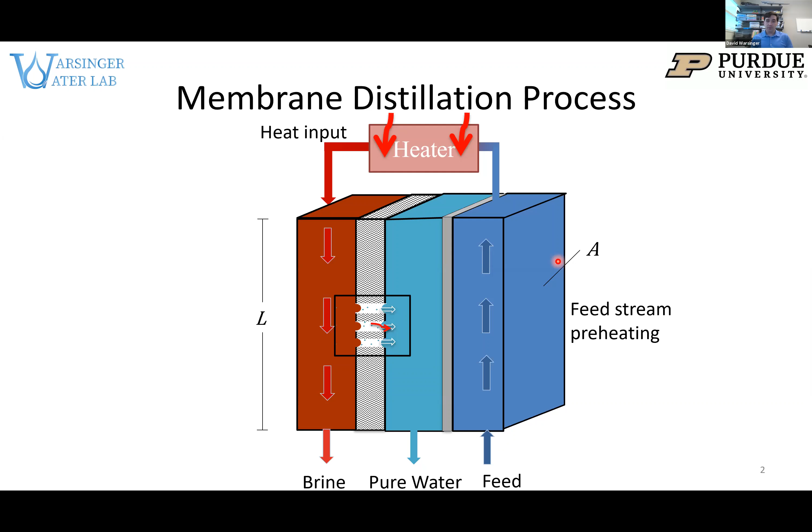There are a few different configurations used for membrane distillation. Perhaps the most common is air gap membrane distillation, and these configurations are often defined by what is occurring in the gap between the membrane, shown in gray, and the condensing surface, shown here in an orange copperish color. Air gap membrane distillation is particularly good for higher salinities.

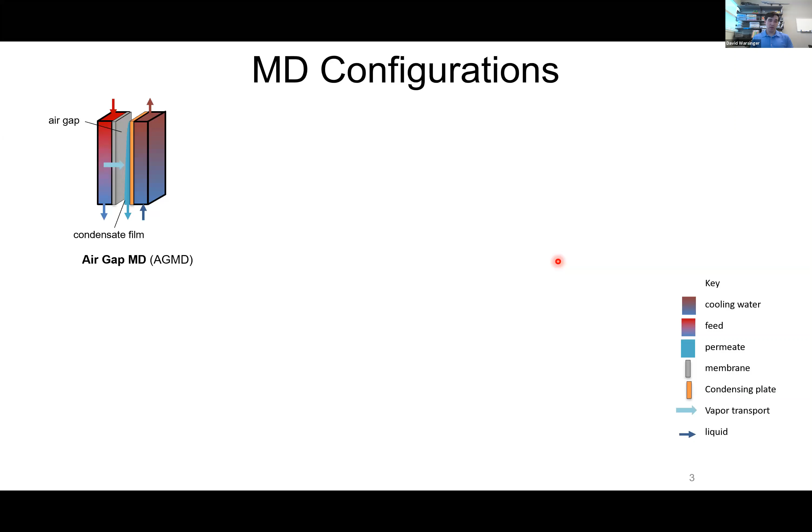There's also permeate gap, or PGMD, which is the acronym used in papers in the field. This is where the entire gap is flooded with pure permeate water. We can improve upon the permeate gap configuration by having conductive materials in the gap to minimize the temperature gradients everywhere besides the membrane itself, where we want our high temperature gradients.

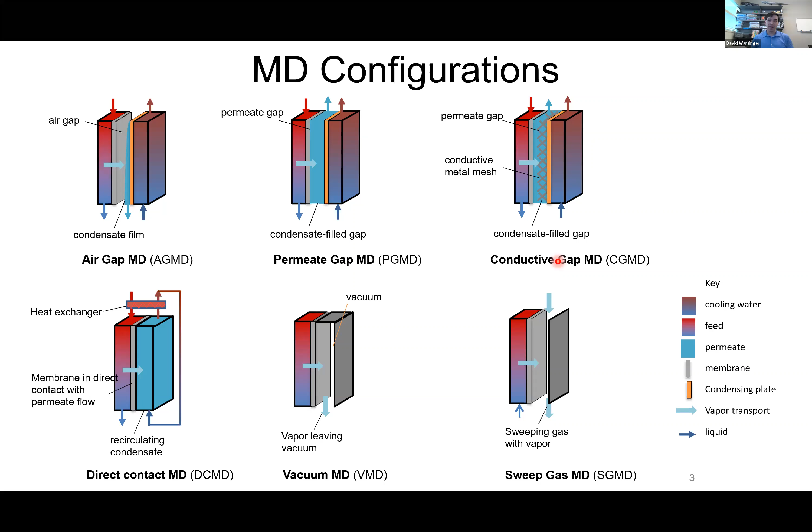There are also a few different process modifications. In direct contact membrane distillation, instead of preheating the feed water, we actually recirculate the pure water in the heat exchanger approach with an external heat exchanger. In vacuum gap membrane distillation, we have a vacuum pump that pulls water vapor out with external condensation. Similarly, sweeping gas membrane distillation has a flowing gas that passes by the cold side of the channel and also has external condensation. So what do the flows in a membrane distillation system look like?

Well, it's a lot like a heat exchanger.

We have a temperature gradient going from the hot side to the cold side, with energy flowing from hot to cool. There are two main components of this energy: the conductive heat losses, which are essentially a loss and inefficiency of the process, and the water vapor evaporating and condensing, which is our desirable desalination effect that we want to maximize in this process.

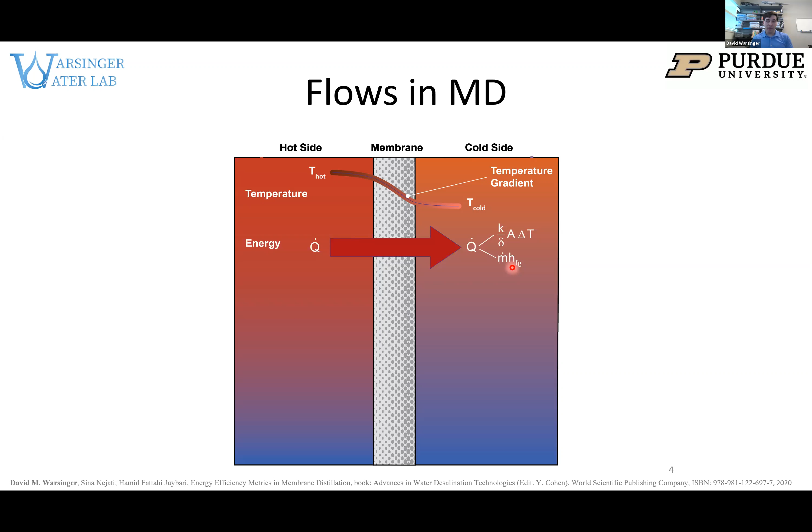Whenever you have heat transfer across a temperature gradient, you're going to have the generation of entropy, and we see that in these systems as well. Likewise, our exergy, or available work, is going to decrease as we have heat transfer across a temperature gradient.

There are a few different key parameters for generally defining membrane distillation systems. First is the permeate flux, simply a normalized water flux per unit area that goes to the membrane. This parameter is important because it essentially allows us to conceptualize the capital costs in these systems. These systems are typically in the range of 2 to 10 kilograms per meter squared per hour, although some systems can reach much higher water fluxes.

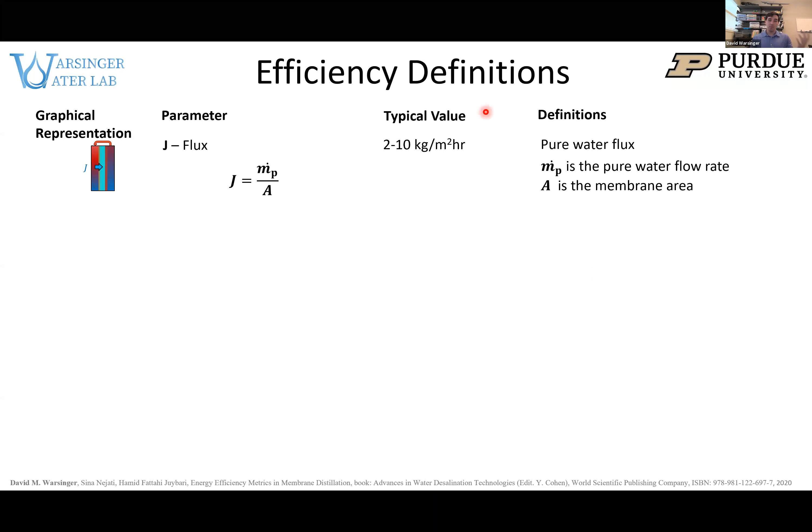Our key efficiency parameter for thermal desalination is GOR, the gained output ratio. We can think of this as an energy reuse multiplier comparing us to evaporation and condensation without any heat recovery. The GOR is defined as our pure water flow rate times our latent heat, divided by our total heat input. At a baseline, boiling water and condensing without any heat recovery, but without losses, would simply have a GOR of 1. Now we're ready for our first audience poll.

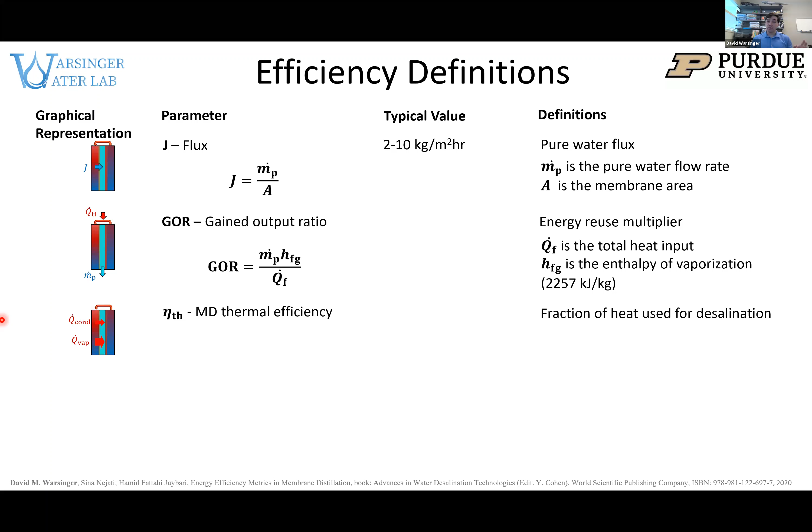Our next key parameter is the thermal efficiency. This is something we can test not on a system level, but on a small coupon scale level. It's basically describing the fraction of our heat that is actually used for desalination—essentially the evaporation heat transfer, QVAP, divided by the total heat transfer. It's capped at 1 because we can't have more than 100% of the heat going towards desalination. Typical values range between 0.5 to 0.93. This is a great parameter to analyze experimentally in the lab, to understand how new materials and innovations can improve the performance of membrane distillation.

Finally, our very key parameter is the second law efficiency. This is our most fundamental universal thermodynamic efficiency, which we can use to compare membrane distillation to a wide variety of other technologies, including those not powered by waste heat or low temperature heat. It is defined by the minimum work of separation, given a particular water recovery, divided by how much work you actually used. For most thermal desalination systems, these values are typically between 0.1 and 10%. Thermal desalination today is not extremely efficient, and we see this a lot in issues in systems that use low temperatures and have large amounts of heat transfer.

Let's graphically compare the gained output ratio efficiency versus our second law efficiency, which actually includes exergy destruction. We see that second law efficiency is a strong function of temperature. Membrane distillation systems demonstrated so far vary across a wide range, usually kept below 100 degrees Celsius. When hybridized with other systems that can use higher temperatures, they can be more efficient. There's enormous potential for solar membrane distillation systems, but we're still early in understanding and modeling and designing them.

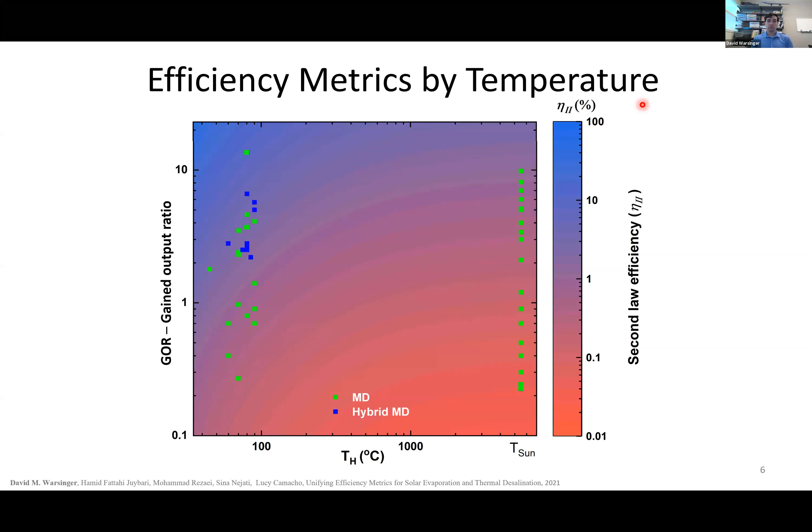We also have a mass transport challenge: we want to maximize mass transport from the evaporation surface to the condensing surface, but minimize heat transfer through conduction in that same area. That makes membrane distillation a really interesting heat transfer problem for optimization. We can also have a few different condensation regimes in air gap membrane distillation, which I'll talk about shortly.

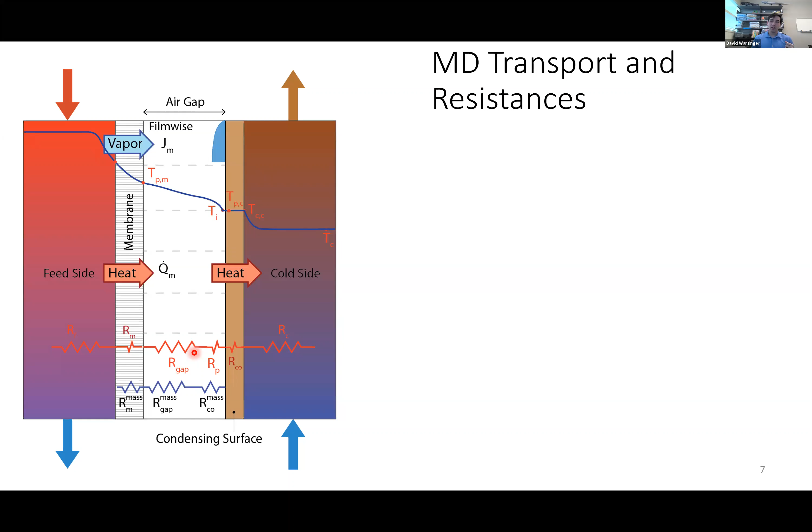So how do we model these systems? There are heat exchanger approaches we can use. There's also 1D discretized or computational modeling, where we do a resistor analysis but break it up into many subsections over a long heat exchanger. We can also use CFD analysis, which is especially important for designing better spacers to reduce temperature polarization.

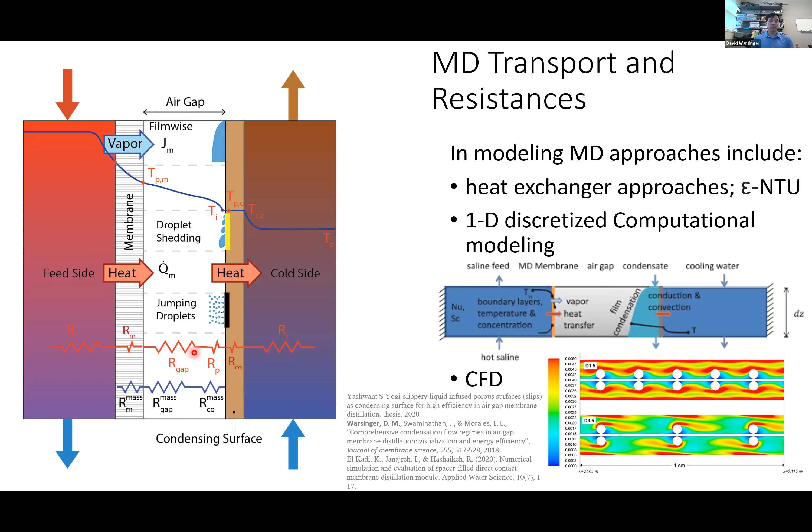What kind of condensation regimes do we encounter in membrane distillation? Typical classical film-wise condensation has been the oldest studied and longest modeled, but it's fairly simplistic, especially given that real systems can be more complex with very narrow geometries. We can have drop-wise condensation using a hydrophobic condensing surface, allowing for enhanced mass transport and draining. Using super hydrophobic surfaces can even cause jumping droplet condensation, which gives excellent heat and mass transport performance.

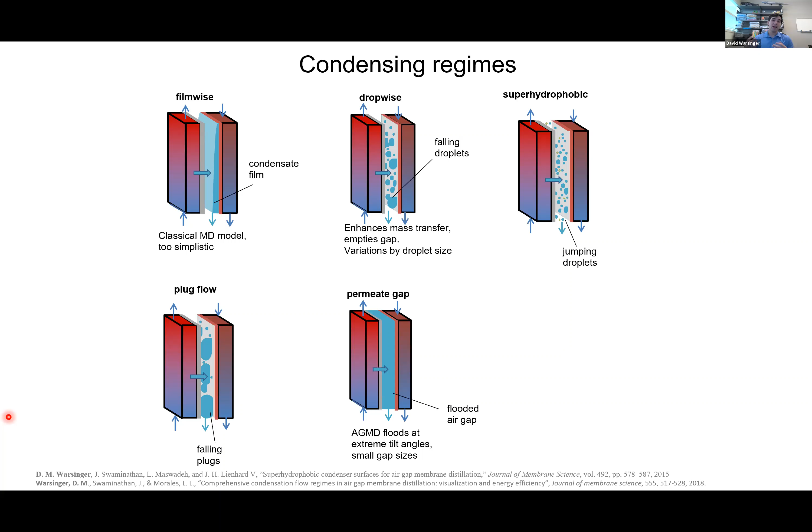We can also start having plug flow as the system begins to flood. If water accumulates faster than we want, we may go into permeate gap mode. In some cases we want a permeate gap, but often at higher salinities, we want a larger thermal conduction resistance in this gap, so permeate gap is undesirable. Notably, to hold up the membrane we often have spacers, which can cause wicking or blocking effects that either help or hinder draining of water droplets.

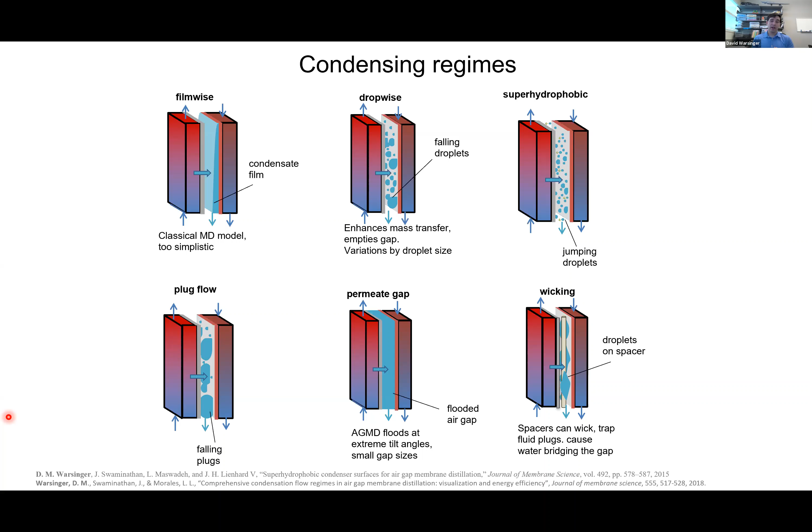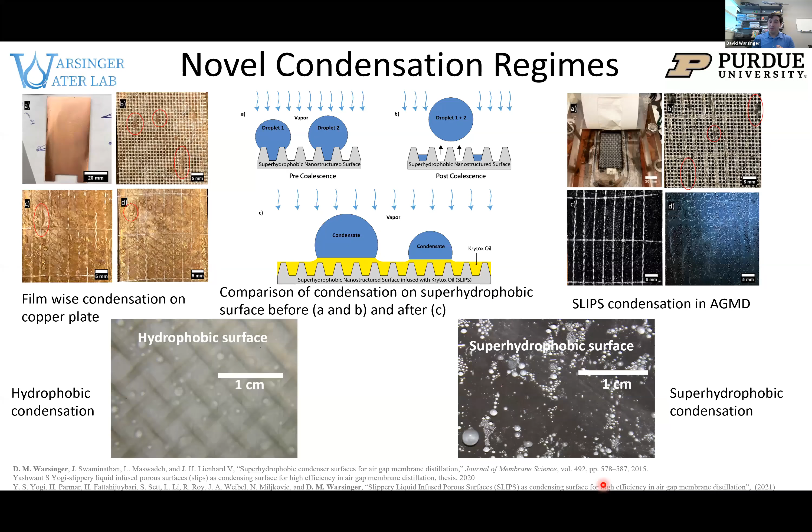So what do these condensation regimes look like? We can use structured nanomaterial surfaces to cause dropwise or jumping droplet condensation. We can use SLIPS surfaces, which we've done in past research. Looking at a condensing surface, we can compare a classical film-wise copper surface versus a super hydrophobic coated surface, visualized through condensing on a sapphire plate so we can see through the entire system. Here we've removed the membrane module, and you can see the variation in droplet sizes and the impacts a spacer can have.

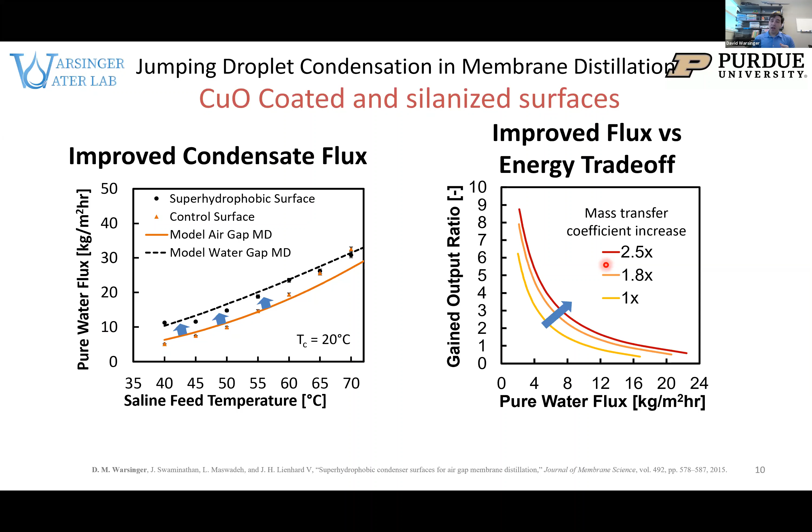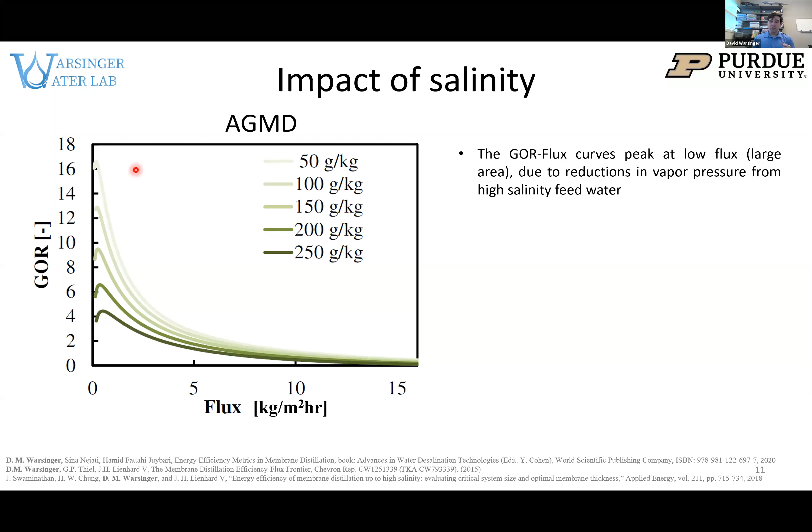Notably, salinity has a major impact on the performance of membrane distillation. This occurs because the presence of salt in the feed water reduces water vapor pressure, leading to lower efficiency. Our maximum possibly achievable GOR, modeled here, will reduce. There's actually a peak maximum GOR achievable under varied salinity conditions, at pretty low flux, because as we get to even lower fluxes we have reduced evaporation from the high salinity, making conduction losses more important. These types of optimizations are key for membrane distillation design.

David talked about conventional membrane distillation technology, and this process has gained interest in research as well as practical application. You've seen many pilot systems being tested, and Guillermo will talk about these pilot studies later. But this technology still has several limitations, and I'll go over some of these with you in my talk. First, in this process, the thermal energy is provided by the hot feed water.

So your total energy input into the system is coupled with the feed flow rate, and the clean water we are recovering is therefore limited by how much feed flow rate you're providing. And so that limits our single pass water recovery to a maximum of about

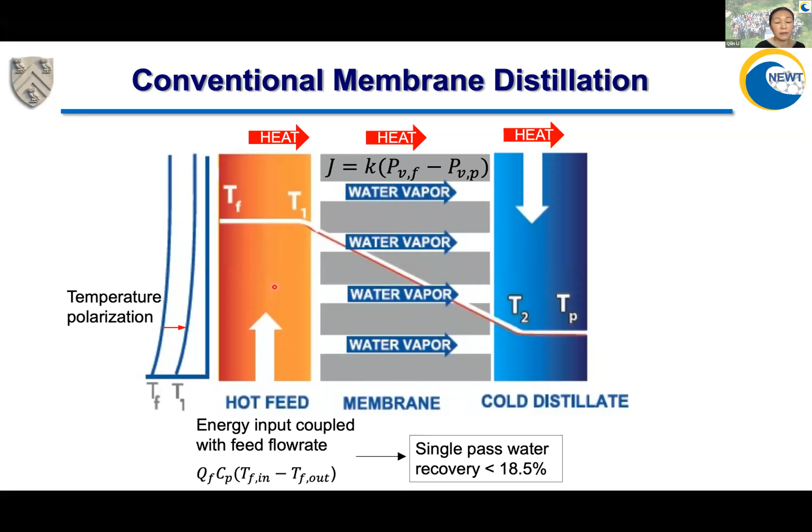18.5%. Secondly, when David talked about temperature polarization, right? The heat transfer nature of this process dictates that the temperature on the membrane surface on the feed side is going to be lower than the bulk feed temperature. And similarly, on the permeate side, the temperature on the membrane surface is going to be higher than your bulk permeate or coolant temperature. And so that reduces your effective temperature difference across the membrane, meaning here T1 minus T2 can be significantly lower than TF minus TP, depending on the hydraulic condition in the feed channel, and that reduces your flux of the membrane.

And thirdly, this process, like a heat exchanger, the average thermal driving force is going to decrease with increasing membrane module length. And so it has been difficult to scale up this technology.

And finally, because our heat is provided by the feed stream, when the brine exits the membrane module, there's still significant amount of thermal energy in the brine. So recovering that thermal energy from the brine is very important in improving the overall thermal efficiency of the process.

Now, if we change this heating strategy instead, if we can put a coating on the membrane surface that can generate heat, either by photothermal conversion or by Joule heating process, then we can decouple our heating supply from our feed water's flow rate. Here we can independently vary our energy input, and as such, this would allow us to gain a much higher water recovery in the process.

And because the surface of the membrane is hottest in the system, we're actually reversing the temperature polarization. And because the water is being heated while it's moving along the membrane surface, we will be able to maintain the thermal driving force better than the conventional membrane distillation process.

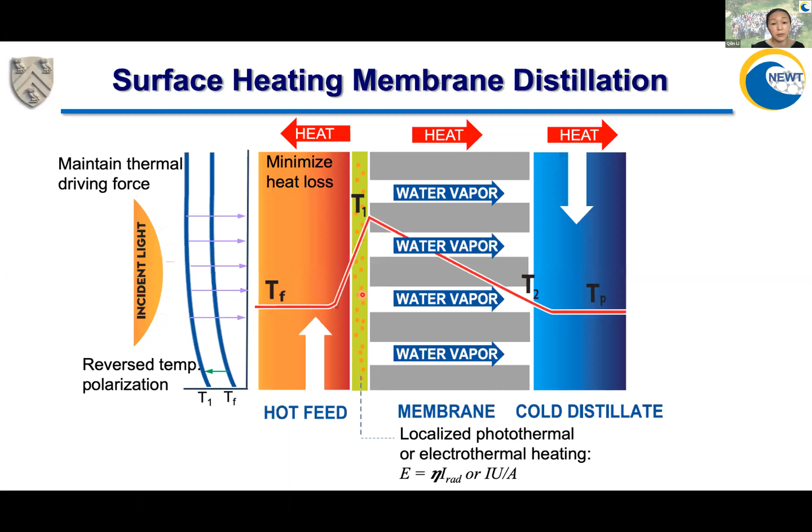So I'll briefly talk about each next. A lot of photothermal nanomaterials have been used for photothermal evaporation or photothermal distillation. Some of these have also been used for photothermal membrane distillation, and they include plasmonic metal nanoparticles, semiconductor materials, and most widely used are carbon nanomaterials because of their low cost and broad spectrum absorption from sunlight.

And some polymers and hybrid materials have also been used. There's a lot of research that has carefully designed the structure of the coating for enhancing evaporation efficiency, and those are mostly designed for solar evaporation, where you would try to draw liquid water to the surface exposed to sunlight and maximize evaporation efficiency. If you're trying to use the same material for membrane distillation, there are additional considerations because we're now using it in a continuous flow system where there is significant hydraulic shearing and potentially pressure as well in the system.

So in the design of the coating, we need to consider very carefully the material used, the binders that are used, and the structure of the material applied to maximize light absorption and minimize reflection of sunlight. We also consider thermal conductivity, as David mentioned, since one loss of energy is conductive heat transfer through the membrane.

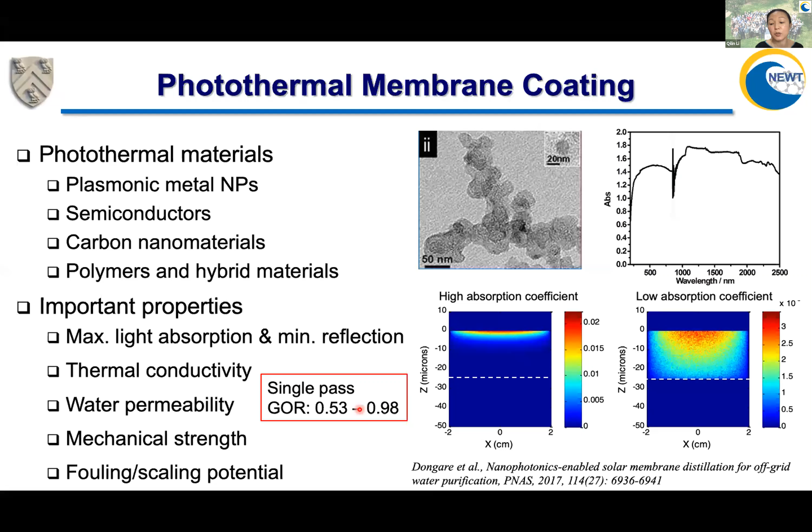So far, among the various photothermal coatings that have been tested, the single pass GOR - this is the energy utilization for evaporation when you have water passing through the membrane module one time without any heat recovery measures - ranges from 53 to 98%. 98% is really, really good energy efficiency. So we are there in terms of photothermal materials.

Now, one of the most commonly used approaches to apply these photothermal materials onto a prefabricated hydrophobic MD membrane is electrospinning, and it has a lot of flexibility in terms of incorporating different types of photothermal nanomaterials into the coating structure, and naturally forms a very porous coating layer on the base membrane surface.

Now, if you have a hydrophobic nanofiber coating, the air-water interface is going to form on top of the photothermal coating. That actually reduces the amount of heat exchange between the coating material and the feed water, as well as increasing the vapor transport resistance across the membrane. So now the vapor has to transport not only through the base membrane, but also through the coating.

But if you make the coating hydrophilic, then the liquid water will be able to penetrate through the hydrophilic coating completely. So you still have your air-water interface formed on the base membrane surface without adding any vapor transport resistance. At the same time, we maximize the contact between the liquid water and your photothermal coating, maximizing heat transfer from the coating to the feed water.

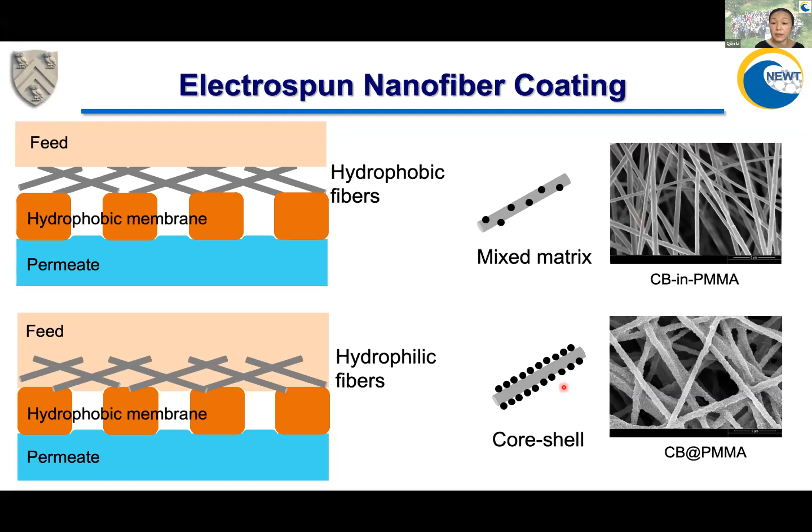And here are some of these results to show the difference between these two different approaches. As you can see in this first case, we have carbon black photothermal nanoparticles in a mixed matrix nanofiber that's embedded in PMMA substrate. Because PMMA is hydrophobic, you form a very hydrophobic surface coating. And in the second case, we have the carbon black nanoparticle coated on the PMMA nanofiber surface.

Let me see if I can play the video here. Oh.

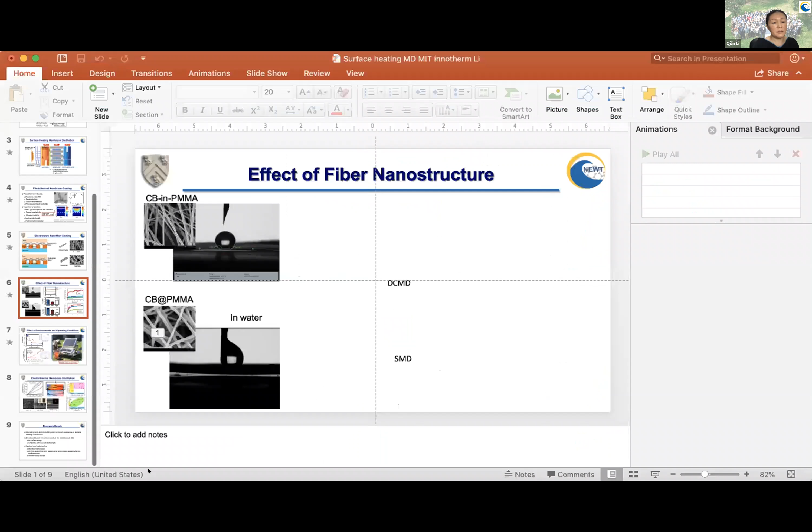I was having some issue.

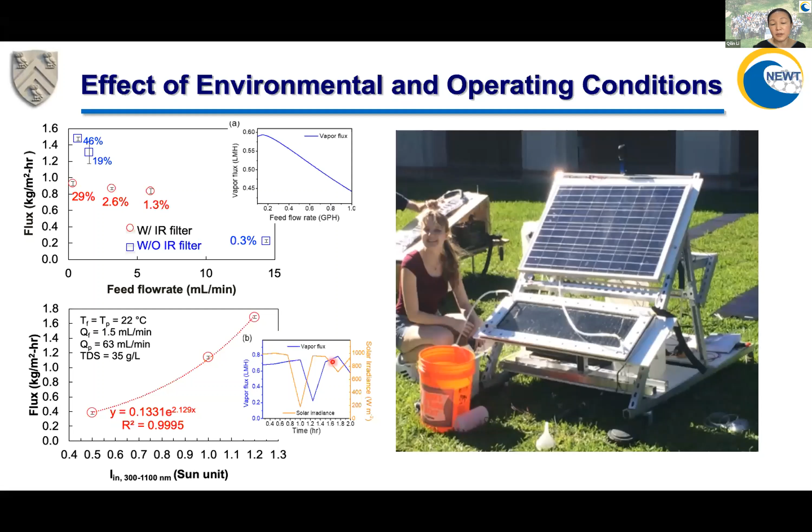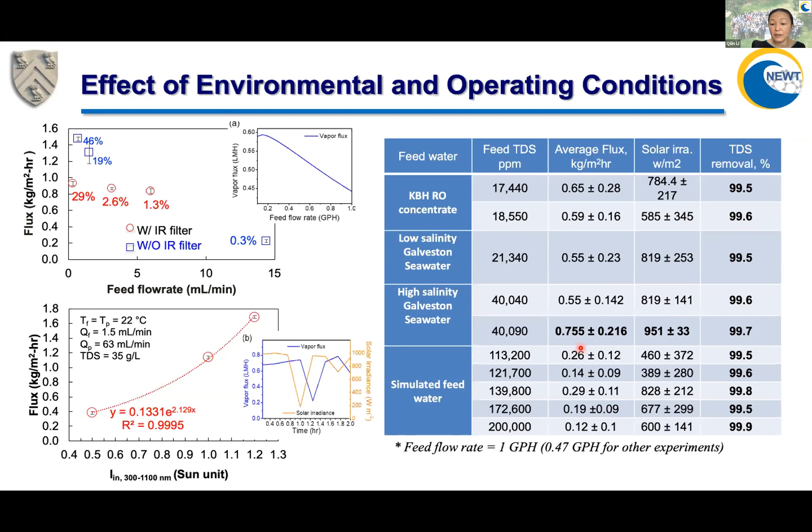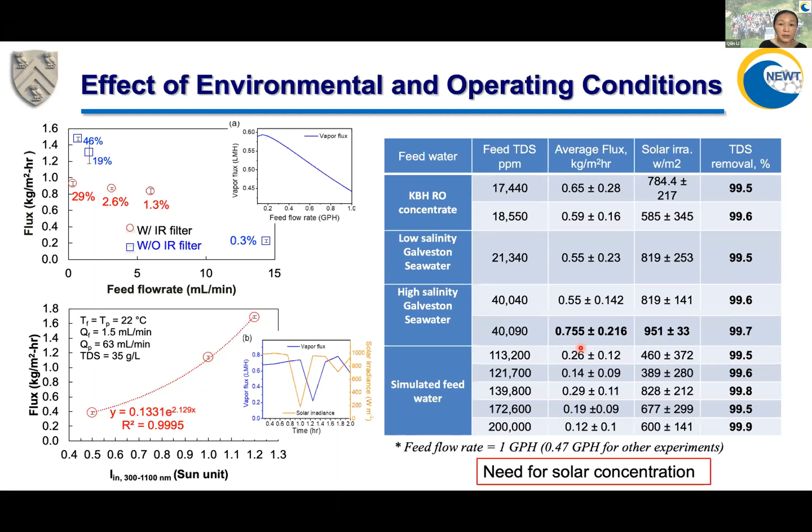This tells us that if this process is to succeed for practical industrial applications requiring much higher production rates, we need to increase the energy input intensity, meaning we need solar concentration. A different approach, distinct from solar, is to use electricity to provide surface heating and the high energy intensity needed for high water recovery and high water production rate.

So the technique we developed applies an electrically conducting coating on the membrane surface. This work, the first electrothermal MD work, was published by Professor David Jassby's lab in 2017, where they used a carbon nanotube coating bound by PVA and demonstrated clean water production by putting an electric current through the coating. This was the first demonstration that you can use a Joule heating material to achieve membrane distillation.

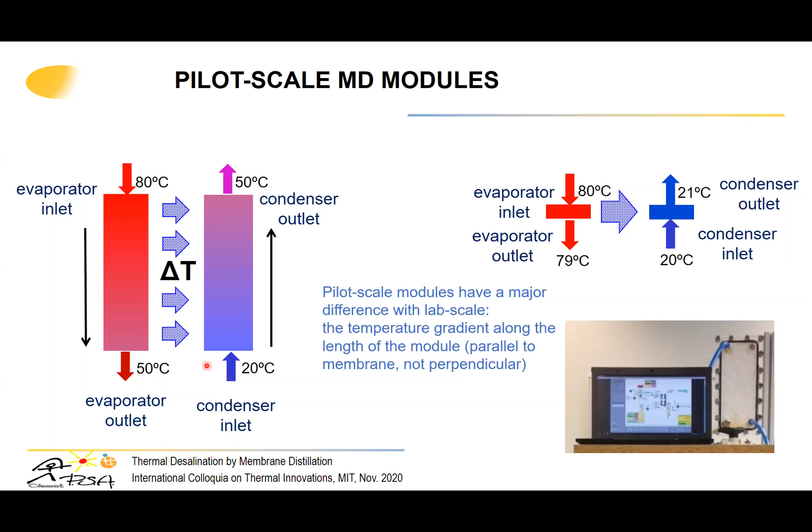Membrane distillation requires heat, and heat is never for free. From the very early stages of membrane distillation, there's an article from 1987 by Tony Fane, noting that recovery of the latent heat of condensation is desirable. But as it happens, heat exchangers are typically more expensive than membranes. So the goal of commercial module developers is to maximize energy efficiency by recovering the latent heat of condensation internally.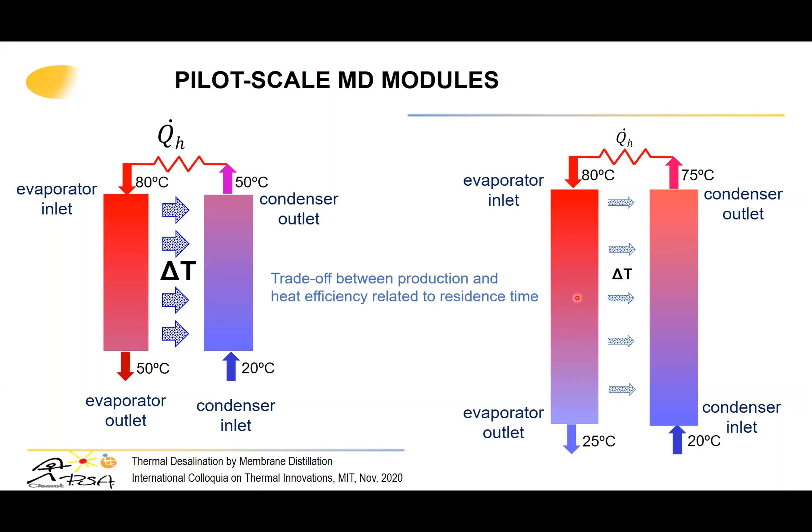This is where the length of the channels plays an interesting role. If we extend the channels, we enlarge the residence time, and by using the feed as coolant, we can preheat the feed quite significantly and reduce the need for external heat. Unfortunately, this will also reduce the transmembrane temperature difference and the driving force, so there is a trade-off between production and heat efficiency related to the residence time and ultimately the length of the channels.

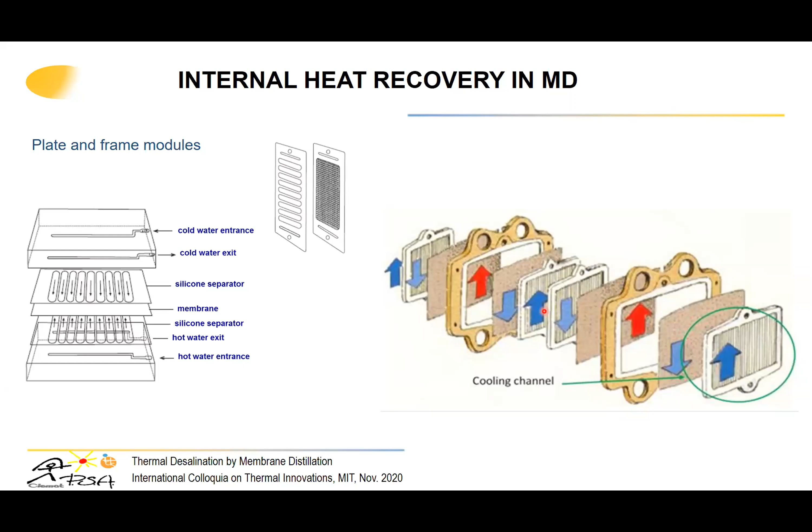How to achieve this internal heat recovery in membrane distillation modules? With plate and frame modules, it's really complicated to get long channels combining these membranes and condensate channels, and it's demonstrated by the performance results of plate and frame commercial modules, Scarab and Keppel-Seghers modules: the GOR rarely exceeds 1. Only in this case, where 3 modules are coupled in series for enhanced heat recovery, does the GOR exceed 1.

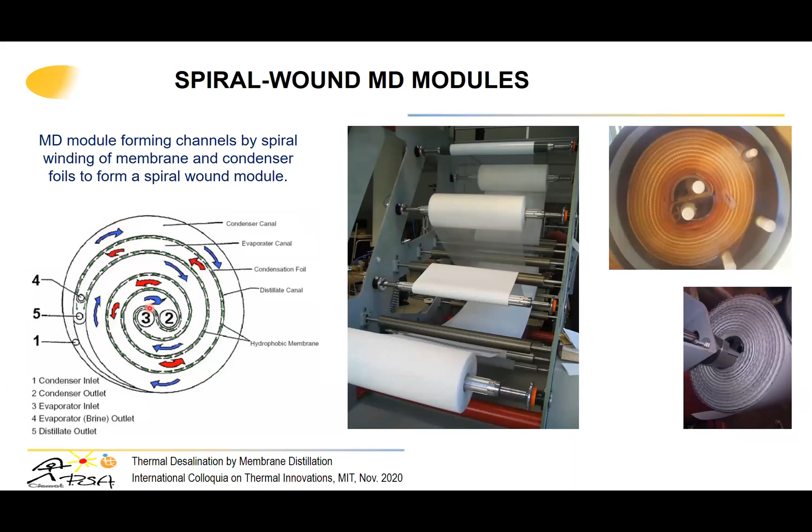Spiral wound modules have it easier for internal heat recovery by guaranteeing full countercurrent circulation, and also the hot input is in the center of the module and the coolant on the outside of the module. So there is a natural temperature gradient and natural insulation by keeping the heat inside the module.

There are several developers of membrane distillation modules, Solar Spring or Memqua, but the Dutch company Aquastill made a significant improvement by combining several envelopes in a single module. This way, there can be more channels in the module, and then the residence time can be extended for the same membrane area and feed flow rate. So that gives rise to more energy efficient modules.

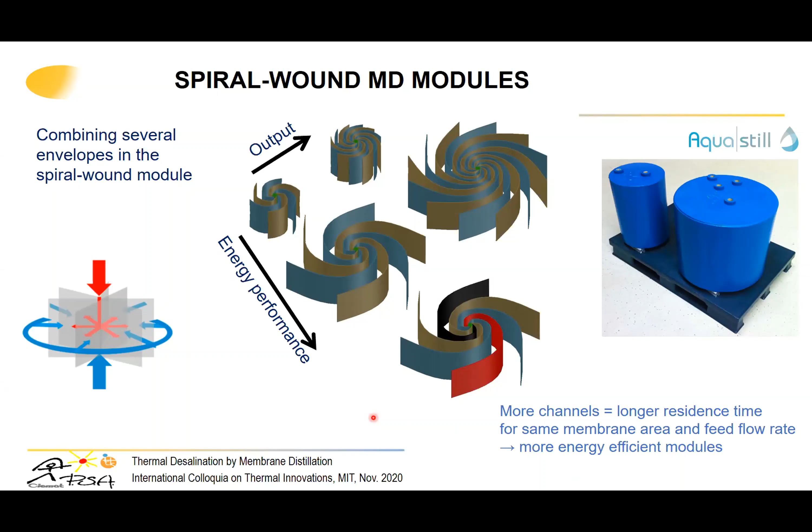Now I will present a summary of the performance analysis of spiral wound pilot scale modules along this graph that shows the flux versus GOR. For Solar Spring modules operating in permeate gap configuration, the results are along this line. An improvement can be achieved by deaerating the feed.

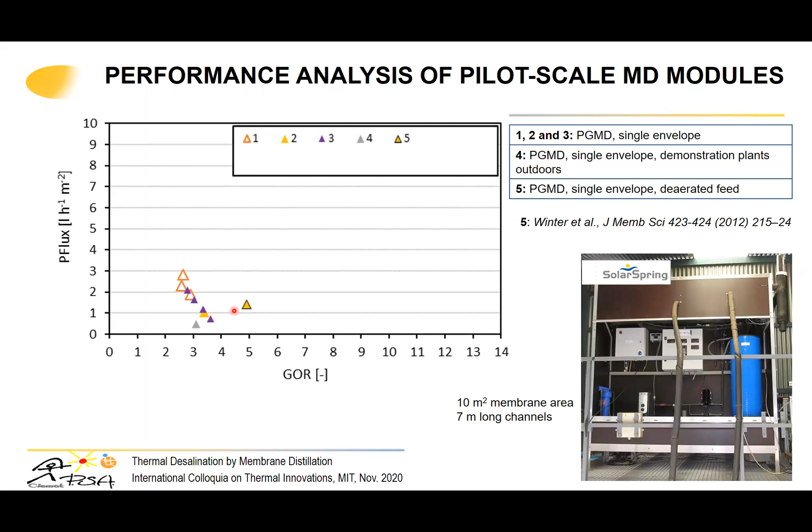Air gap membrane distillation has slightly less performance, but it can be significantly improved by extracting the air from the gap. This is the so-called vacuum-enhanced air gap membrane distillation configuration. This reduces the mass transfer resistance of the gap and therefore improves the flux with the same energy input.

So it also improves the GOR. The multi-envelope modules of Aquastill have larger flux and GOR: the shorter module has a larger flux and the long module a larger GOR than the rest. But the main disruptive improvement is operating these modules in the vacuum-enhanced air gap configuration, where we can see that the short module can reach a flux of almost 9, and the long module a GOR of 13.5.

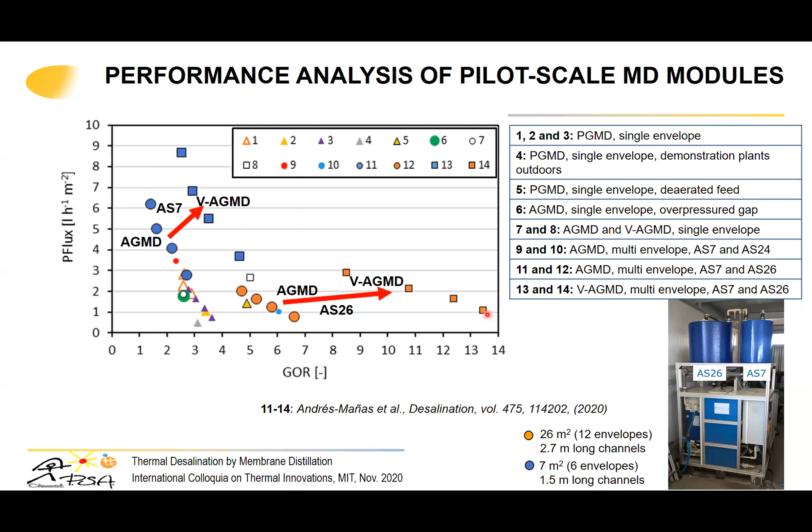This is actually the best commercial performance recorded for pilot scale modules, with a specific thermal energy consumption lower than 50 kilowatt-hours per cubic meter, and this is better than all other thermal desalination technologies. I didn't mention before that all this comparison has been done for seawater desalination. And this module has 12 envelopes and channels 2.7 meters long.

And in this case, the vacuum, extracting the air from the gap, is done with a Venturi effect suction, so therefore with a low electricity cost penalty.

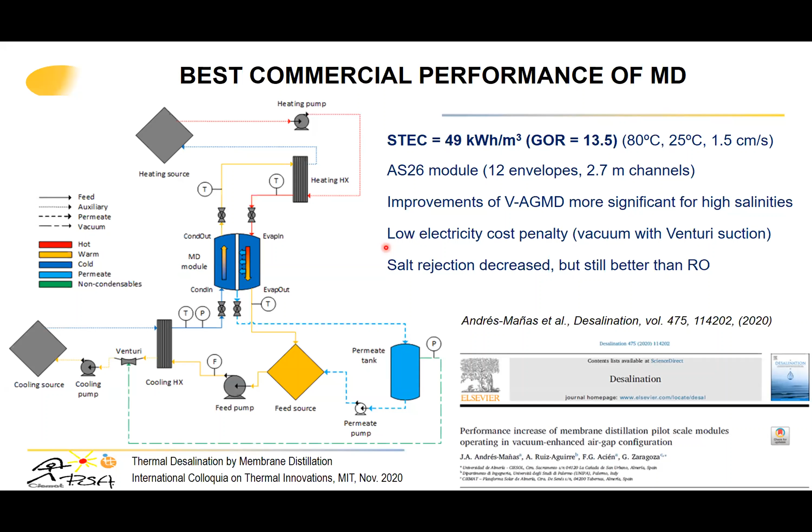Hollow fiber modules can also have internal heat recovery. As a matter of fact, this concept of internal heat recovery was first implemented in hollow fiber modules by the University of Twente in the Netherlands last century. And it has been retaken and exploited by Tianjin University, who have developed hollow fiber modules with internal heat recovery, combining hollow fiber membranes with hollow fibers acting as heat exchangers.

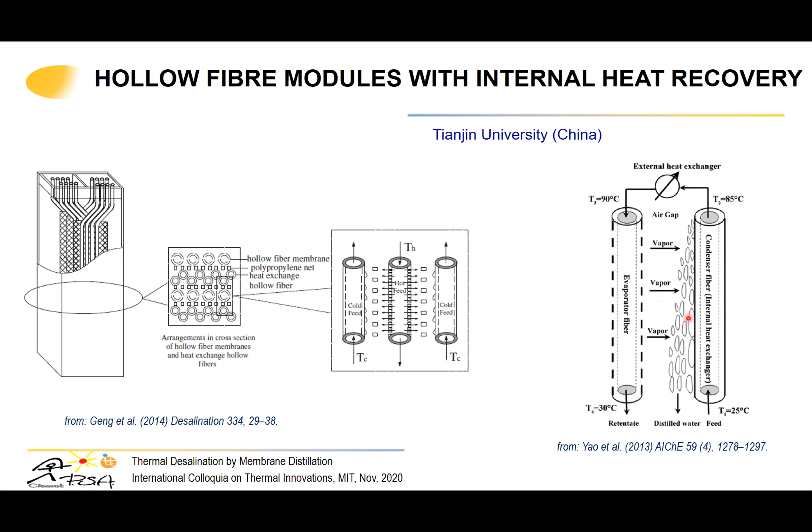So we have the feed entering this condenser fiber and heating with the latent heat of condensation, and then the hot feed enters the hollow fiber membrane. So a similar scheme as we saw before, and the results are quite promising. With modules 1.2 meters long, the GOR can be 13.8, and with modules a bit shorter, very large fluxes.

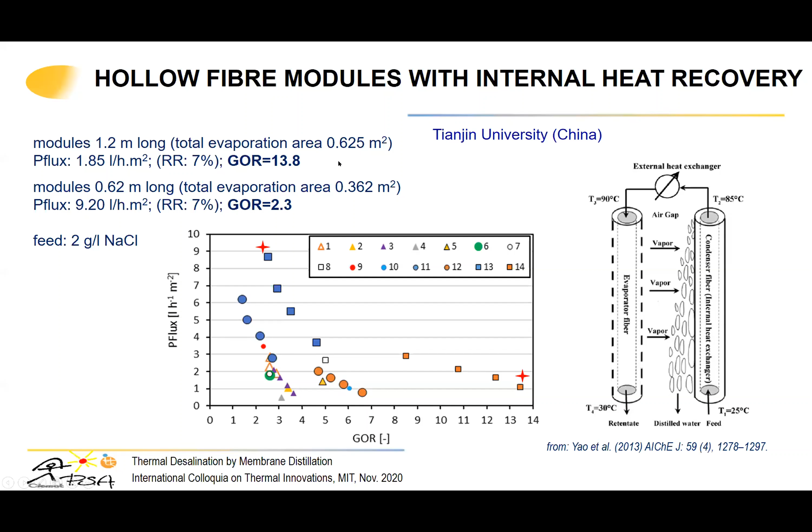So the challenge is to upscale these modules to larger membrane surface area, and also address the electrical consumption, because the hollow fibers have larger pressure resistance, and therefore we can expect larger pumping needs and more electrical consumption with these hollow fiber modules. Heat recovery can also take place: instead of heating the feed with the latent heat of condensation, we can evaporate more, recovering the heat as latent heat.

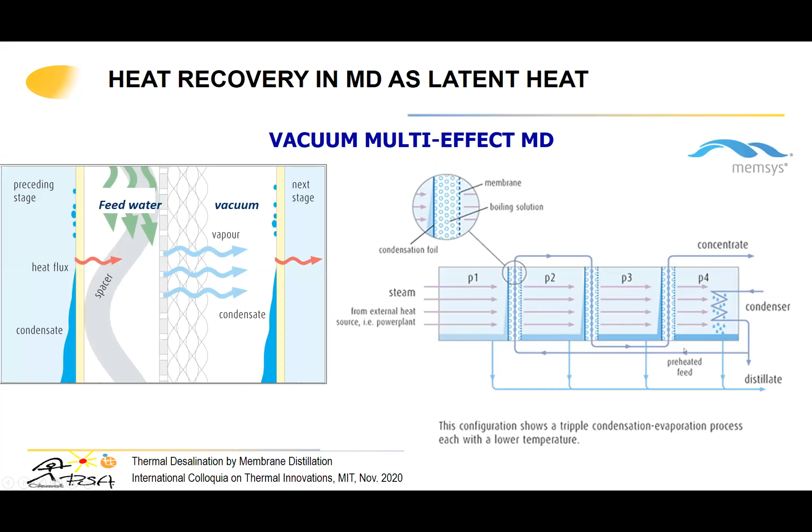This is what memsys proposed: to use the latent heat of condensation of one stage of one membrane to preheat the feed, to evaporate the feed in a consecutive effect. So they have modules with several effects reusing the latent heat of condensation for further evaporation. So it's a multi-effect configuration, and this is in vacuum membrane distillation.

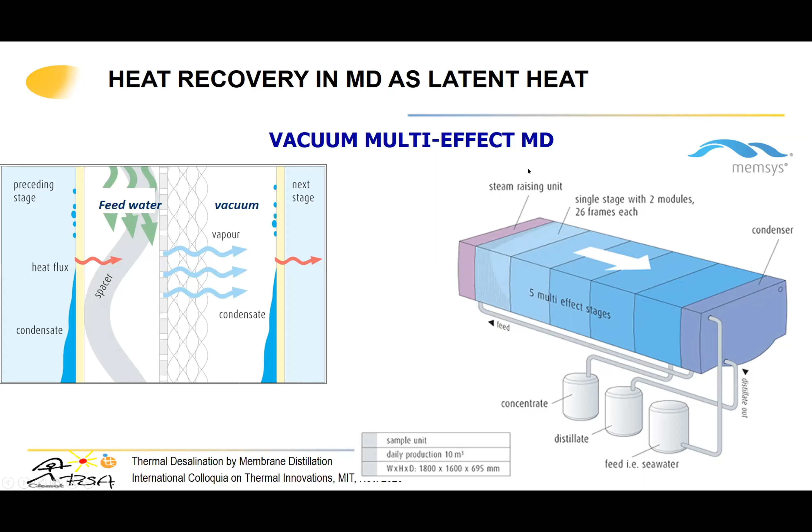So the modules are vacuum multi-effect membrane distillation. And for the pilot modules with 4 effects, we see very large flux. Of course, there are 4 effects, and the GOR is 3.4, I think. If the GOR was to raise to a similar number as that achieved by Aquastill modules, then a much larger number of effects should be part of the module. The module should have at least 13 effects to reach 13.5 GOR. 13 effects is rather unfeasible for this kind of module.

They depend on the vacuum pump to establish the flux, the feed flow rate through the different effects, and also the pressure losses will be larger, and of course the electrical consumption of such a large vacuum pump will be unfeasible, really.

And upscaling—now let me finish my presentation with the upscaling of pilot scale to industrial size desalination plants. We're talking about the modular technology. So the developers build racks of modules in parallel and cluster them in a similar fashion as RO plants. This could be equivalent to an RO train, an RO membrane train in an industrial plant, and having a series of these racks will give us an industrial plant.

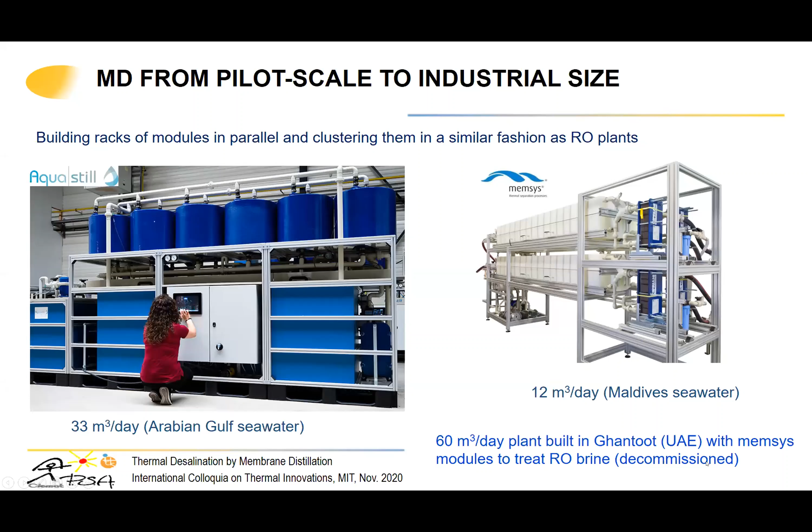Aquastill currently builds these units with up to 20 modules that can produce more than 30 cubic meters per day with Arabian Gulf seawater. memsys also builds large modules producing 12 cubic meters per day with Maldives seawater. memsys built a 60 cubic meter per day plant to treat RO brine in Ghantoot in the Arab Emirates. This was soon decommissioned.

And the largest existing industrial size plant is built with hollow fiber modules. Econity hollow fiber modules, a Korean company, and this plant is part of the MVP research program in South Korea. These modules operate with vacuum membrane distillation configuration, and they don't have internal heat recovery, so they need thermal vapor compression for improving the heat efficiency.

And the total size of the plant was 400 cubic meters per day. So most of you were right in the poll. This plant has a total of 224 modules with rather good flux, but thermal energy consumption is also high. The GOR is not good—it's not good because they don't have this internal heat recovery.

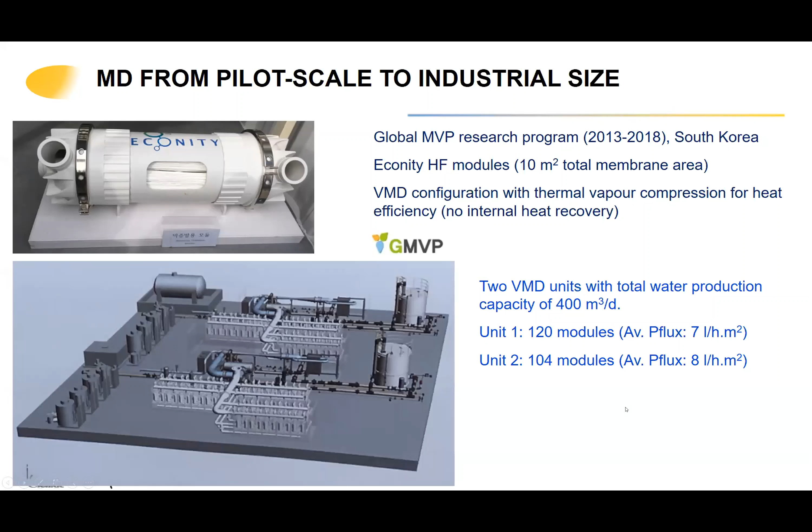And that's all I have for today. Thank you very much. I'm looking forward to further questions and discussion later.

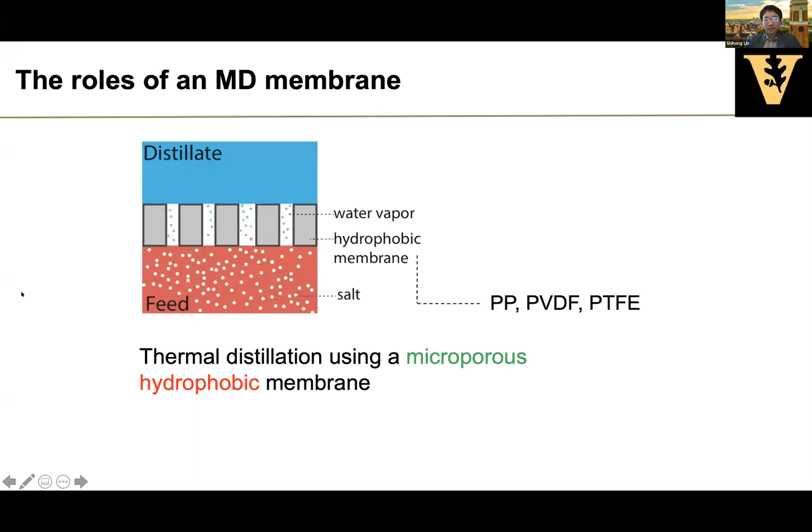Before we get to that, let's review a little bit what an MD membrane actually serves in the process of MD. MD is a thermal distillation process using a microporous hydrophobic membrane. The microporous membrane serves as a medium for vapor transfer, so you don't want it to be blocked. And the hydrophobic membrane serves as a barrier for direct liquid transfer.

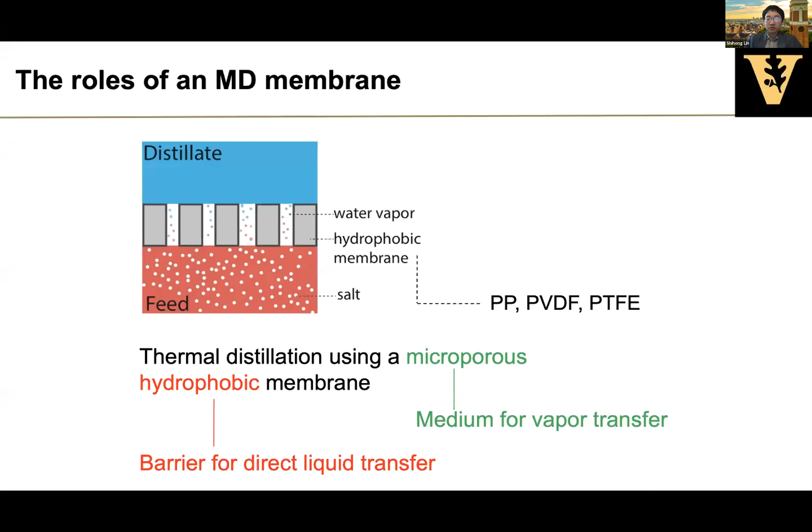And this is exactly why you don't have osmotic backwash as one of the mitigation methods, because you don't want any water to pass through the pores as liquid. Now, there are several ways an MD membrane can actually fail, unfortunately, because it's a hydrophobic membrane. The first failure mechanism is what we refer to as wetting.

So if you have some low surface tension liquids, or if the liquid contains surfactants, then it may be possible that the liquid can penetrate through these pores, and the consequence of that is that the salt rejection would decline substantially, and the process would not be effective as a desalination process.

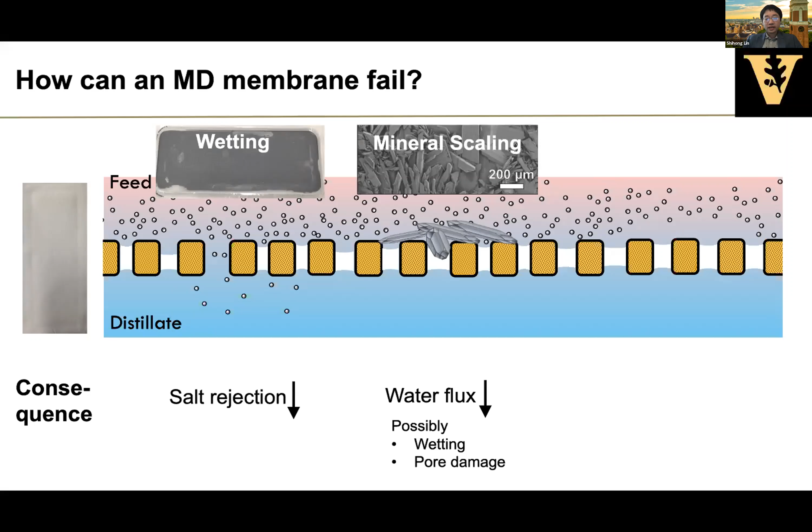The second possible failure mechanism is what we call mineral scaling. If you have a highly concentrated stream of salt, eventually the salt would crystallize and form what we call scale on the membrane surface. The direct consequence of that is reduced water flux, because they're blocking these pores, but it can possibly also lead to pore wetting and pore damage.

Especially considering the possibility of crystallization pressure that is exerted on the pores. Now, the last but most common failure mechanism in all membrane processes, not unique to MD, is what we call fouling. When you have organic material or sometimes even oil or biological microbes, foulants, they grow on the surface and block the membrane pores. The obvious consequence of that is water flux decline, and in some cases it would also induce wetting.

So fouling is a very common problem to all membrane processes and has been extensively studied. I think the common solution is that you can do a lot of pretreatment and also put a coating layer that is very hydrophilic. That's something I'm not going to talk too much about in detail, but I would rather focus on wetting and mineral scaling, which are relatively unique to membrane distillation, especially wetting. You would not find the problem of wetting in all other membrane processes.

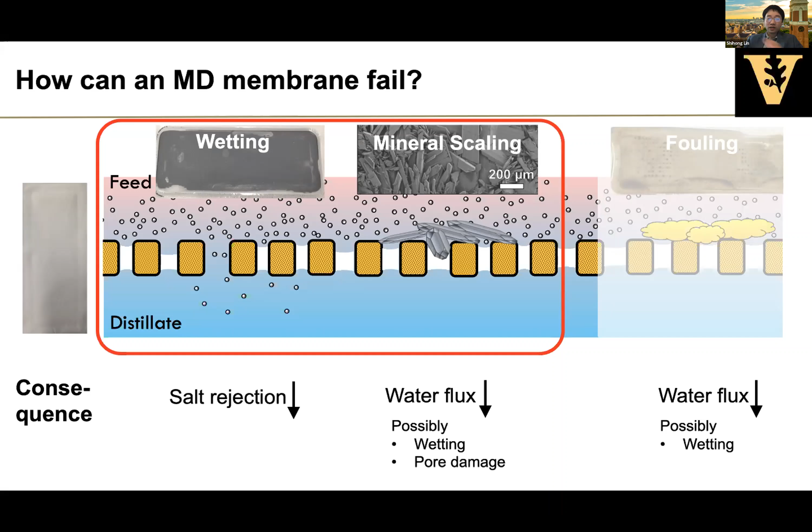All right, so let's first talk about wetting a little bit. So how do we detect wetting? Before we talk about that, let's define the 3 stages of wetting.

In the first stage, there's no liquid infiltration into the pore at all, so the membrane would look opaque. Then in this transition stage, you will have some partial infiltration of the liquid into the pore, but it has not completely penetrated through the pore. Lastly, when the liquid completely penetrates through the pore, now you end up with wetting of the pore and the passage of the salt through the pores. In this case, if the entire membrane is fully penetrated by the liquid, then it will look translucent.

Conventionally, people monitor wetting by measuring the distillate conductivity. If some of the pores are wetted, then you will find salts in the distillate and the conductivity would increase. The limitation with this conventional approach is that you would not be able to detect anything happening in this transition stage where you have partial infiltration.

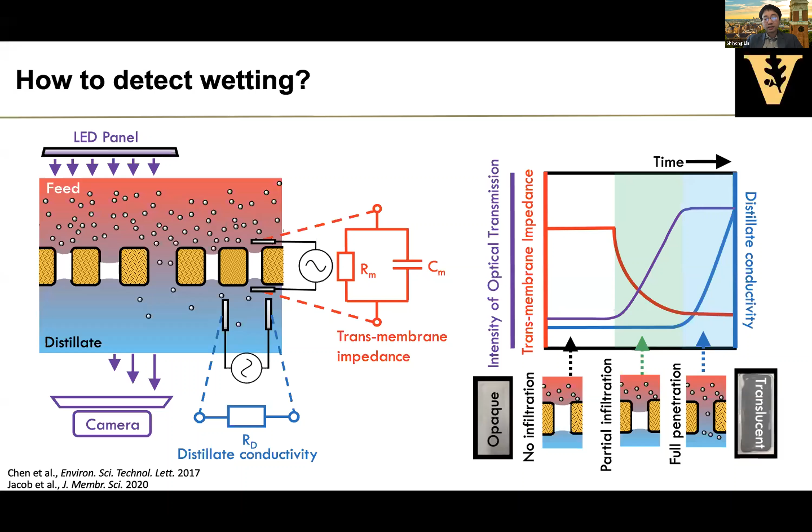So recently, people are exploring electrochemical methods using impedance, or also optical methods, which can actually provide you the capability of detecting this imminent wetting that is going on, but none of the pore has been fully penetrated, which is actually very helpful going forward, for example developing mitigation strategy and also trying to understand the fundamental mechanism of wetting. So how does wetting occur?

There's this very important concept called liquid entry pressure, which is basically the minimum hydraulic pressure that you need to apply in order to push the water through this pore. This liquid entry pressure is dependent on the surface tension of the liquid, the surface energy of the material, and also the pore structure like pore size and geometry.

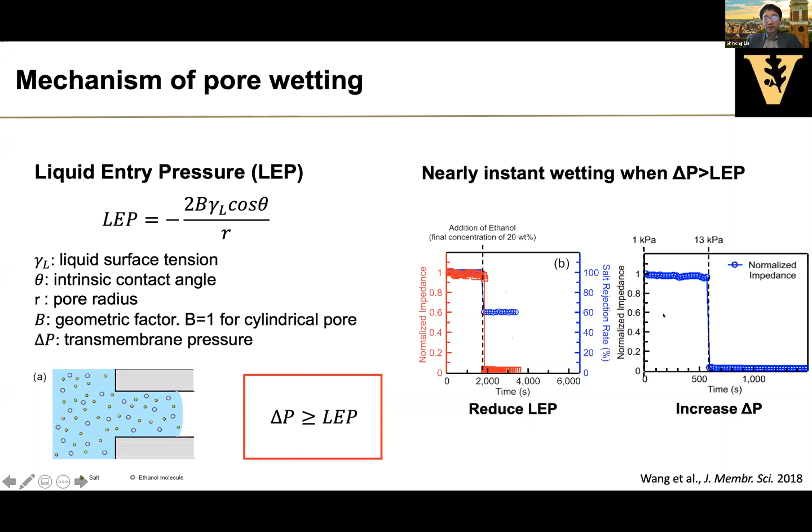So the very simple criterion for wetting is that the hydraulic pressure difference between the 2 streams is larger than the liquid entry pressure. Indeed, if you have something like alcohol, or if you dose alcohol into a solution to reduce its surface tension, then you can actually induce instant wetting, because now this criterion is met. Or with the same solution, if you increase the delta P, increase the pressure, you will also induce instant wetting. So this is basically some experimental evidence of how this criterion works.

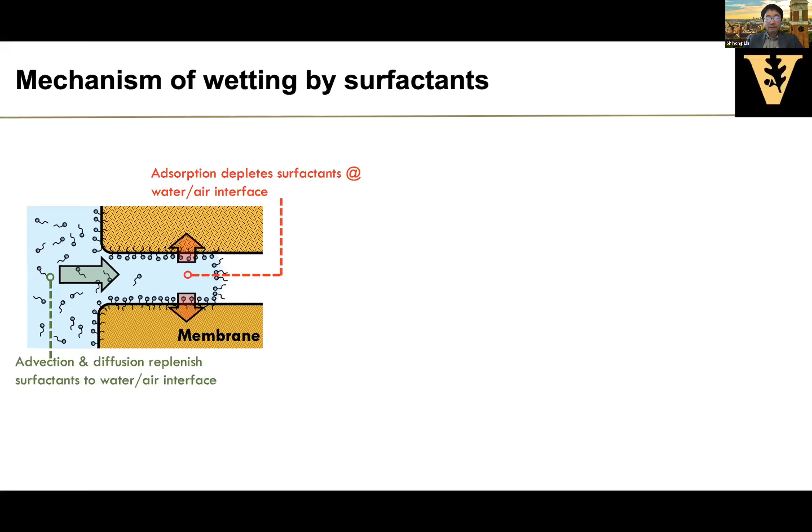But when you have surfactant in the solution, which would reduce the surface tension of the solution, things get a little more complicated because of the adsorption of the surfactant onto the membrane pore surface. So long story short, I just want to point out a few important observations here. First, the adsorption of the surfactants to the surface would actually reduce the concentration of the surfactants at the frontier.

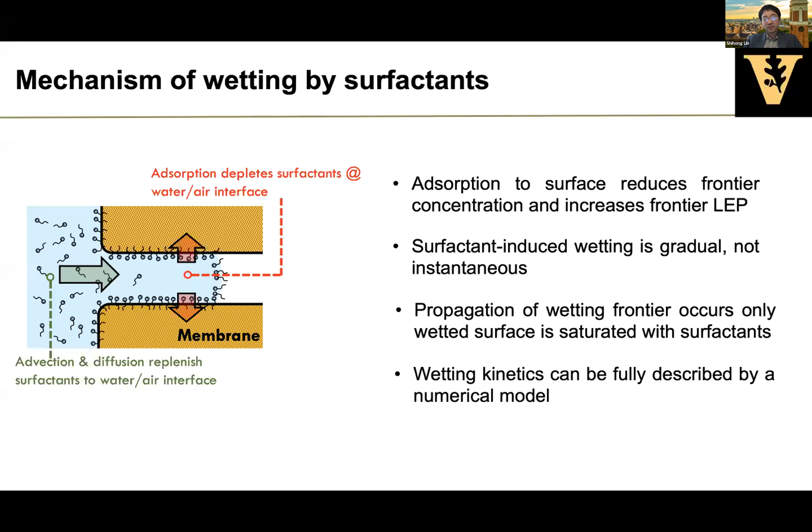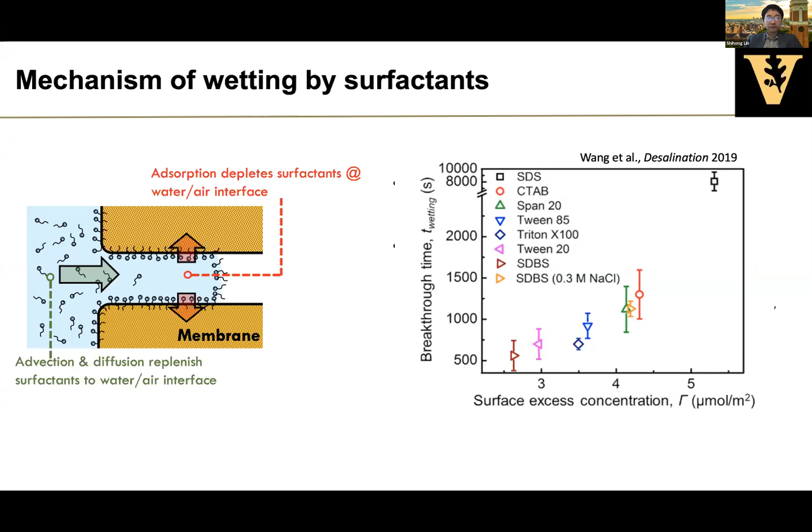The propagation of the wetting frontier occurs only when the wetted surface is saturated with surfactant. And lastly, the wetting kinetics, based on this model, can actually be fully described by a numerical model. One interesting observation from that numerical model and experiment is that given everything else the same, how well the surfactant can induce wetting, or how fast it can induce wetting, is strongly dependent on the surface excess concentration, which is basically a quantitative metric about the space the surfactant occupies when it adsorbs onto the surface. So how do we prevent pore wetting?

There's very little we can do in terms of pretreatment to prevent pore wetting, because it's very difficult for us to remove alcohol or surfactant compared to removing organic foulants. So the answer to this question is that we need to develop something called an omniphobic membrane. An omniphobic surface is basically a surface that is resistant to the wetting of both high surface tension liquid like water and low surface tension liquid like oil. That's why it has the name omniphobic. There's a beautiful theory about how we can actually make this omniphobic surface.

The idea is that if you have a low surface tension liquid, a cylindrical pore would actually be wetted very easily based on the thermodynamics of the system. But if you can make some type of reentrant structure, where the entrance of the pore is actually smaller than when you get deeper into the pore, then it is possible to achieve omniphobicity.

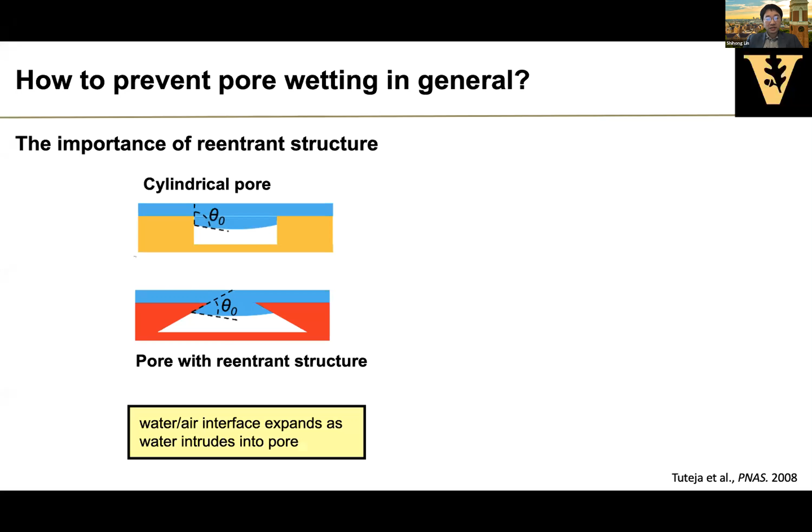The idea is that you want to create a structure so that the water-air interface would expand as the water intrudes into the pore. There's a very beautiful theory behind this, and some of those classic works were developed at MIT. The idea is that if you have low surface tension liquid and a cylindrical pore, then thermodynamically, as the liquid infiltrates, the free energy of the system would just drop monotonically. Whereas if you have a reentrant structure, then you have this energy barrier, and the non-wetted state can actually be maintained as a metastable state.

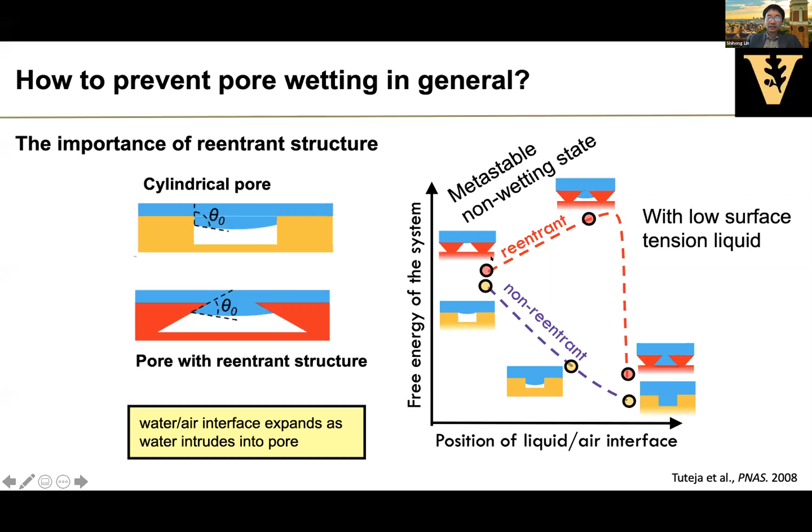I'm not going to get into more theory, but let's talk about how these membranes can actually mitigate wetting. The first omniphobic membrane was actually developed for membrane distillation application back in 2014. Following that, a lot of people started to develop different types of omniphobic membranes using different approaches.

But one caveat I want to point out is that even though the definition of omniphobic membrane suggests it is resistant to oil wetting, that was defined in air. So if you put an oil droplet in air, the oil droplet is not going to wick through the pores. But if you put an oil droplet underwater, you will still find this oil droplet spreads along the surface without wicking into the pore. There's no difference between that and a hydrophobic membrane. In this case, an omniphobic membrane would not give you the capability of anti-fouling, because the pores are still being blocked.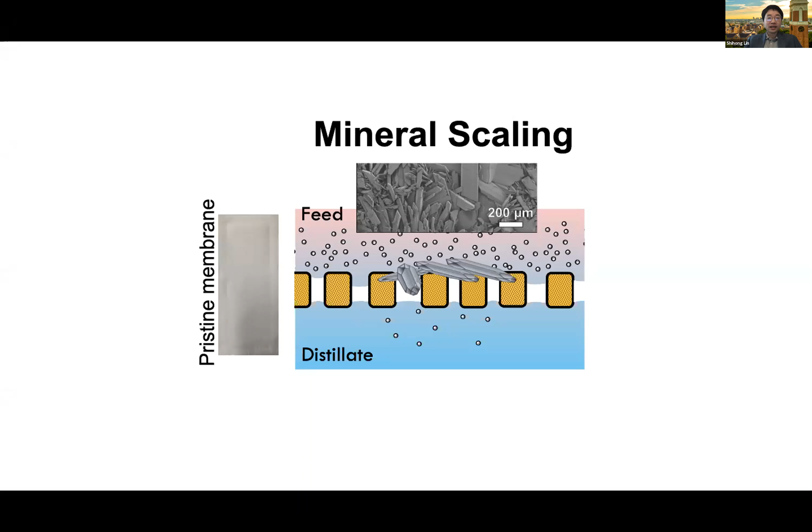So let's switch gears to mineral scaling, which is really important if you want to employ membrane distillation for treating hypersaline brine and maximize water recovery. Some basic theory about nucleation: this is the classical nucleation theory, which says that the free energy of the system is a sum of the interfacial energy plus the bulk energy.

So overall free energy looks something like that. As the crystal size gets bigger, you basically encounter an energy barrier. So you need to overcome this energy barrier before you can grow big crystals.

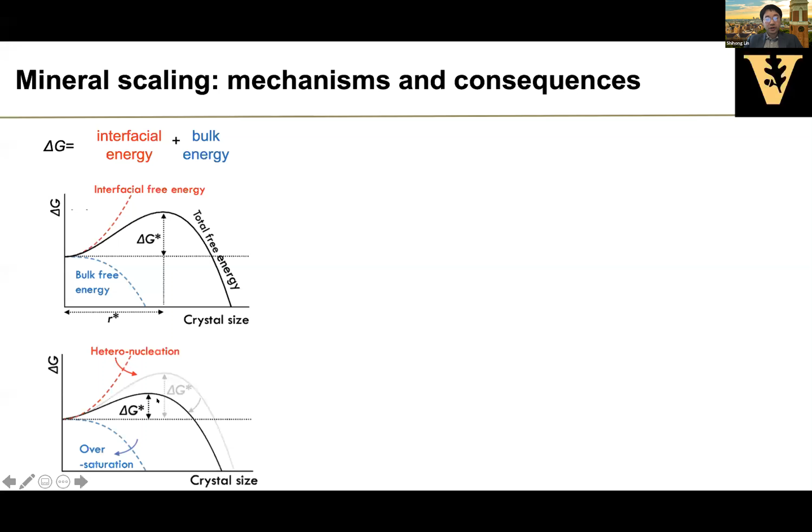There are two possible mechanisms to change this energy profile. The first is when you have oversaturation, when you concentrate more and more and the salinity becomes really high, you have oversaturation and it would reduce this part of the curve. Or when you have a foreign surface, you have heterogeneous nucleation, which would also reduce the energy barrier. I also want to point out that scalings are not all created the same.

In some cases, for example with gypsum scaling, which is very typical, they tend to form a very crystalline structure, and they can grow. This crystal can grow and become bigger and exert crystallization pressure that may damage the pore.

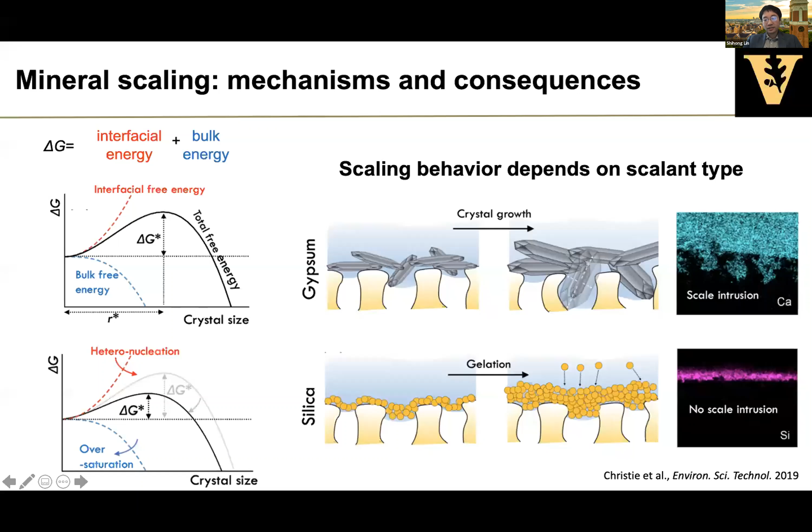While in the case of silica, which is more like a gel, they have this gelation process that would block the surface of the membrane without actually getting into the pore. So you can see, for example, from this cross-section SEM with elemental analysis, very clearly that in the case of gypsum scaling you find calcium deep into the membrane, but not for the case of silica scaling. So how do we mitigate scaling?

If you talk to people in industry, they would tell you that anti-scaling is the most practical approach, and I believe that is actually true. But in the research community, people are looking at approaches that would reduce chemical use. So super hydrophobic membranes are one of the frontiers, I think, as a strategy for scaling mitigation.

A super hydrophobic membrane is simply a membrane that is so hydrophobic that if you put a water droplet on the surface, it would almost bead up like a sphere. So it has a really high contact angle and a really low sliding angle. If you tilt the surface just a little bit, then the droplet would just slide down.

With a super hydrophobic membrane, the water is very slippery on the surface, and there are several mechanisms that may possibly contribute to the scaling resistance with these membranes, but I think it's very difficult to quantify the contribution. The first is reduced surface area for scaling, and the second is reduced surface energy.

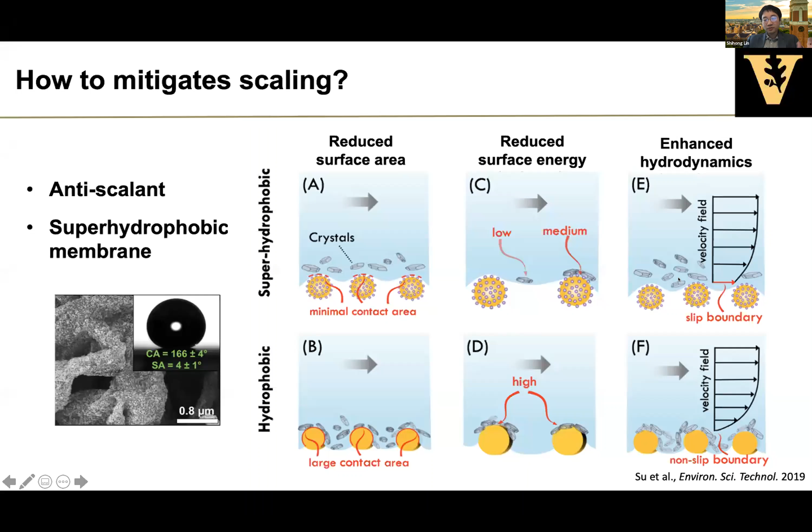And last but not least, maybe the most important, is actually the hydrodynamic effect. Because now the water is staying only on the surface, not inside the pores, it makes it much easier for the scalings to be flushed away.

Lastly, I want to point out there is synergy between material and operation approaches. For example, you can try air back purging, or you can try periodically reducing the feed pressure to push away the scalings on the surface.

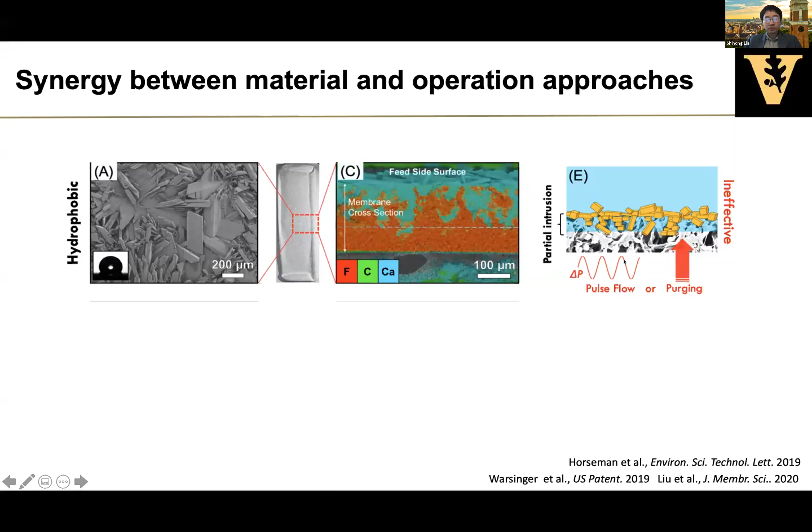But this approach is actually not effective if you have a hydrophobic membrane, because once these scalings form inside the pores, they form a really strong anchor, making this operational approach not very effective. However, if you have a super hydrophobic membrane to prevent any growth of crystal inside the pore, then this approach can become very effective.

Now, to summarize, we can actually develop membranes with different types of wetting properties. A hydrophobic membrane is really bad for all kinds of reasons, so it's very easy to wet, and it's bad for scaling, and it's also very susceptible to fouling.

So you can develop some kind of Janus membrane with a hydrophilic coating so that you have an underwater oleophobic surface, which is really good for anti-fouling against organics or oil and stuff like that. Or you can make a super hydrophobic membrane, which is very good for scaling resistance.

Or you can make an omniphobic membrane. In this case, it's oil resistant and in the air, which is good for wetting resistance. Or in some cases, you can combine two functions. For example, you can develop a Janus membrane based on an omniphobic substrate so that you have underwater oleophobicity and also the wetting resistance for the substrate layer, like a membrane where the top is hydrophilic and oleophilic, and the bottom is omniphobic.

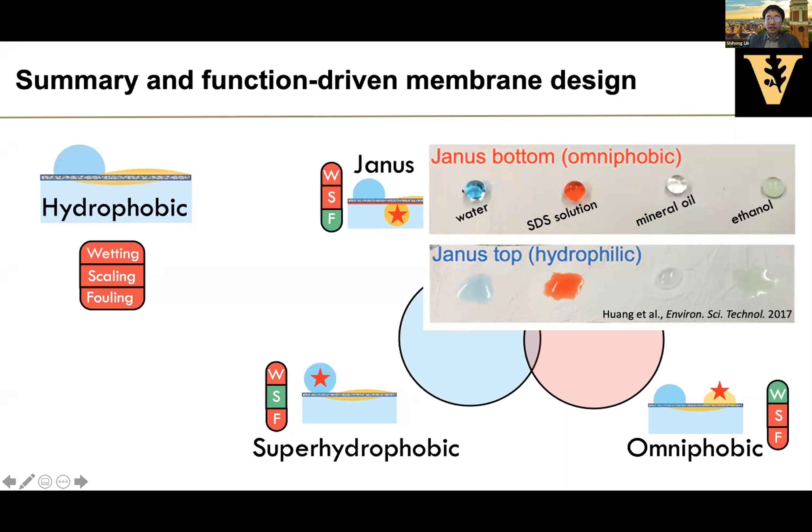In this case, you can achieve really good wetting resistance and fouling resistance, but you will not be able to stop the problem of scaling.

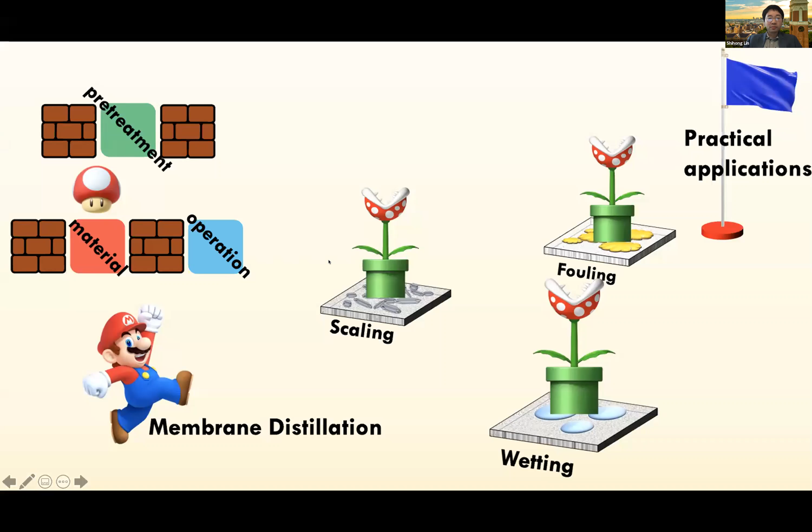So there's no one size fits all. It really depends on what type of feed solution you have. Fortunately, I don't think we would have a feed solution where all this may be a big problem. So maybe some of them would be, in this case, you will choose the right membrane for that application. To sum up, we got these challenges before we can actually arrive at practical application of MD, and we are trying to explore different approaches to mitigate these problems.